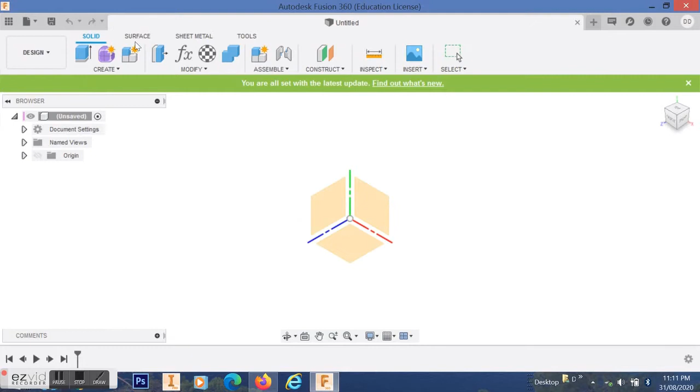First thing is to go and create a sketch. Go to sketch, select a plane on your field of view. Once you've selected that plane, you can select any one of those, and you'll go into 2D view.

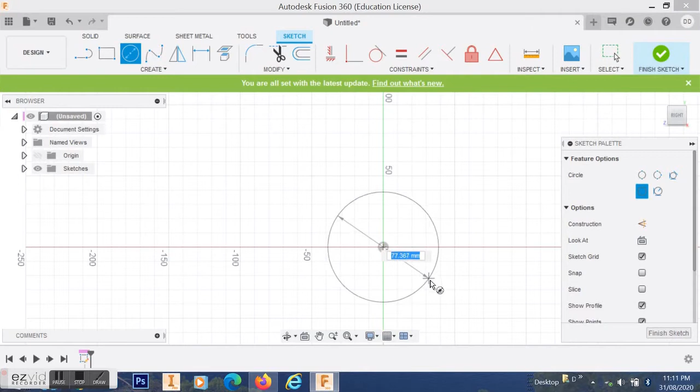Now we're going to create a circle, so select the circle tool, left click, and you'll notice on the side there's a whole bunch of options. Left click, drag out with your left click mouse, and then select the size. I'm going to type in 25 there.

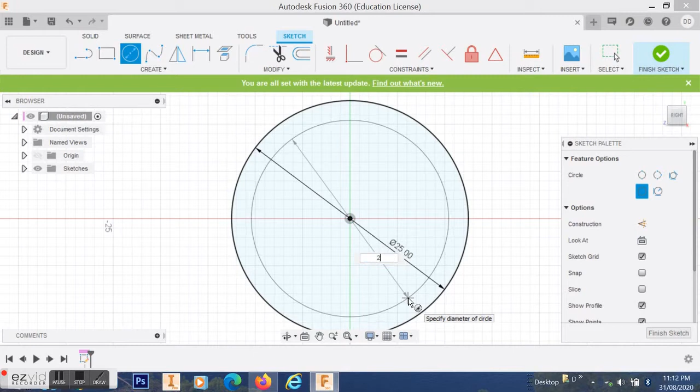Now you can click the fit button if you want to make it big to fit your screen. Click on your circle again, draw another circle out, and this time make it a bit less. This is going to be the thickness of the ring. I'm going to make it 22.

You just type in 22 and hit enter. We've got two circles there. With that, you can use the spin button over here to move your object around in 3D space.

It'll pivot on the center point, so it's useful for you to know. I think we might move across now and start to look in the toolbar up here. You can finish a sketch at the top.

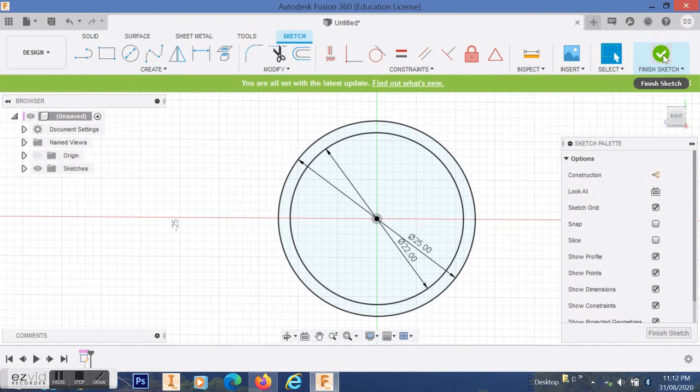Once the sketch is finished, we'll go to extruding to create a 3D shape. So we're going to create that surface and make it an extrude. We click the extrude button up the top there on the left, highlight the surface we want to extrude. Now you're going to hover over the middle of it and it'll turn a blue color.

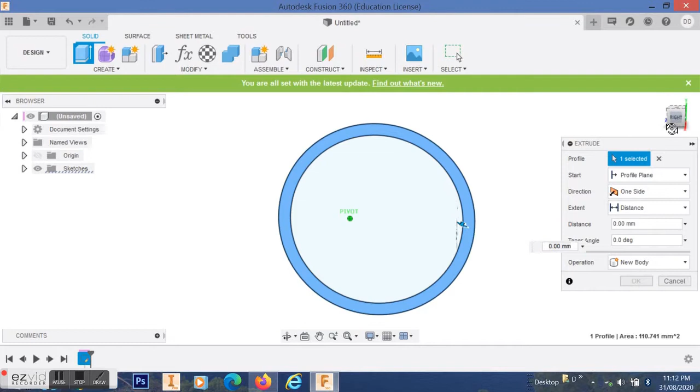On the extrude panel on the right, you'll see a range of options, and particularly we're going to focus on extruding on both sides, making it symmetrical. So you can see the two arrows appear on that disc. There's the two arrows, and we want to drag those out.

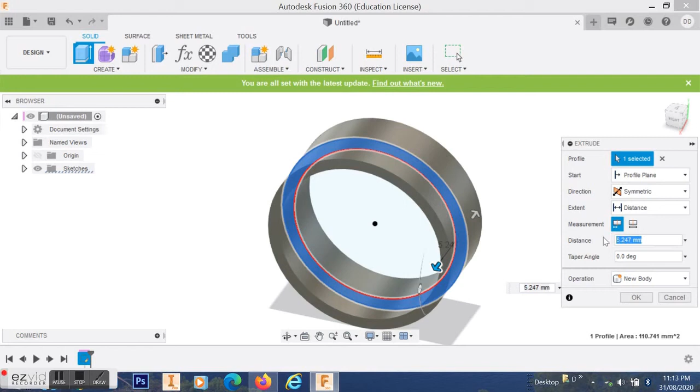We can drag it out by hand if we want, or we could even enter a dimension if we should so choose. So I might make it 10 millimeters on either side, and then click OK, and now we've extruded the object 10 millimeters on either side from that center plane.

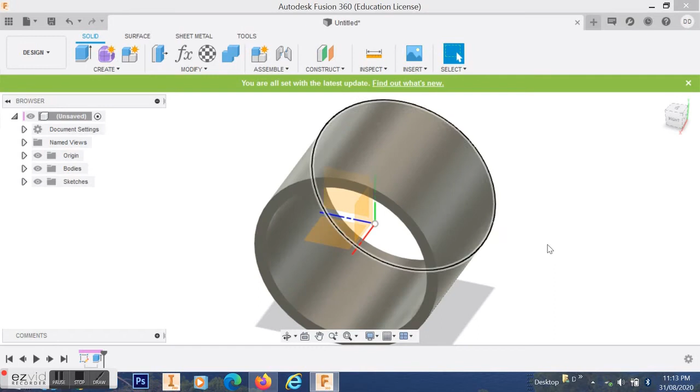Next stage, I'll tell you a little bit about turning it on and off. So if you can't see your center, or if you can't see anything, have a look at those eyes on the left hand side and click them, and you'll be able to bring objects into view and tools into view, or take them out of view if you want.

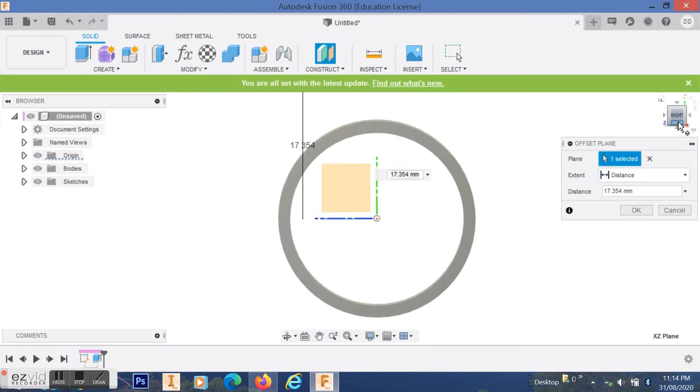Now we're going to go to create a plane. So we're going to select a plane from the plane menu and drag it up, and I'm going to set that plane at a distance of - well, I can just drag it by hand if I want, and type in the information that I want to type in.

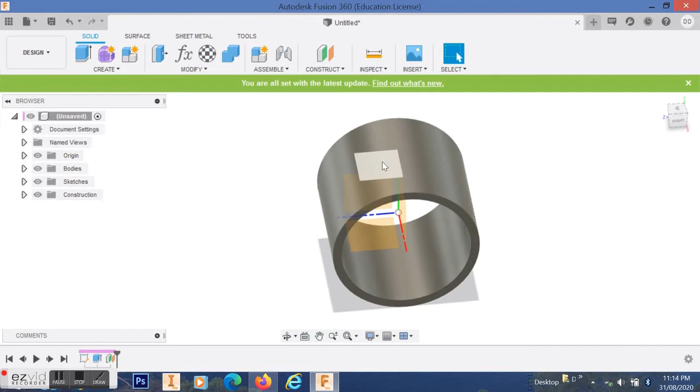If I want to make it precise, maybe make it 14, and then it's time to create a plane. Now that plane we select, we're going to draw on it. We're going to draw on top of that plane because Fusion has to draw on a surface.

You can right click and then select from a menu if you want, which is what I've done, and then we're in a 2D drawing mode again. Now we're going to go to an ellipse. So select from your create panel an ellipse.

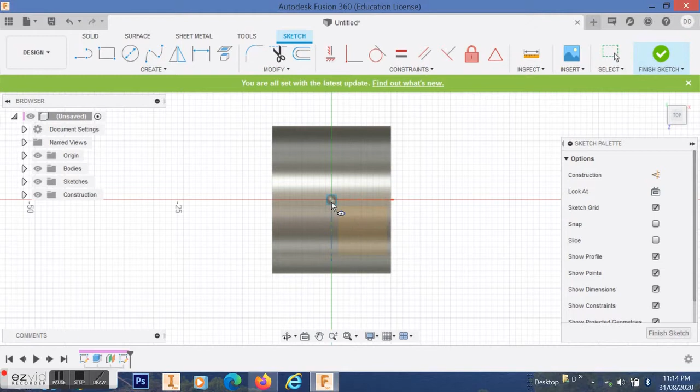Center click on the right in the middle of the top of our ring, and then click on another little section which is the radius of the ellipse. I'm going to go right out to the edge with my left mouse button and then just simply drag out, and you start to see the ellipse forming. Now you can hit escape at any time if you want to get out of this and try it again.

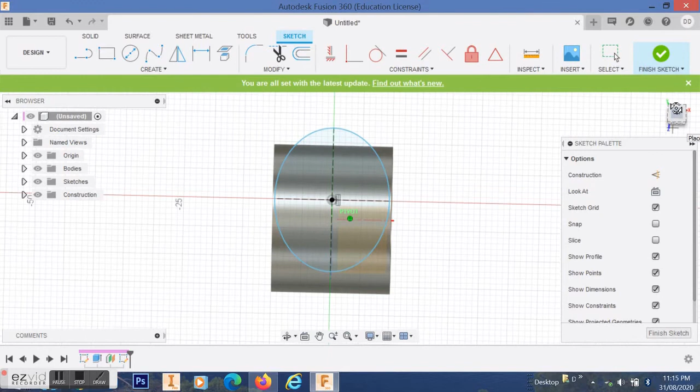Okay, so now I've drawn an ellipse, 14 millimeters from the center of the ring, sitting up there. It's going to be the top surface of the ring that I'm going to put a letter on. There it is sitting, because pretty soon we're going to actually create a loft, which is an interesting transition from one shape to another.

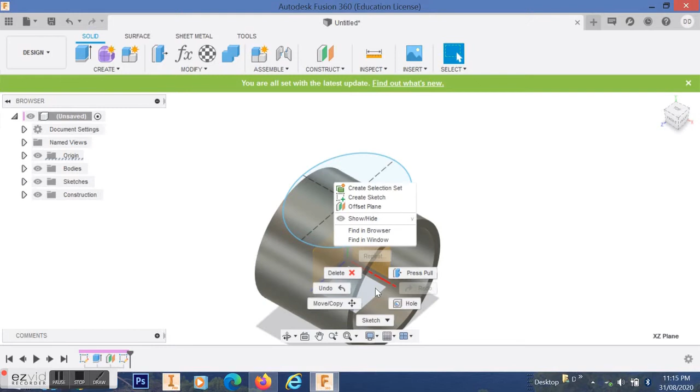Before we do that, we're going to select that center plane down the bottom as I've done, and then we're going to do a sketch. I'll right click to get that menu, and we're going to hit the slice button. Now that just takes a slice all the way through so that we can actually see more clearly how big we want to make our rectangular shape in the middle of the ring that we're going to loft to.

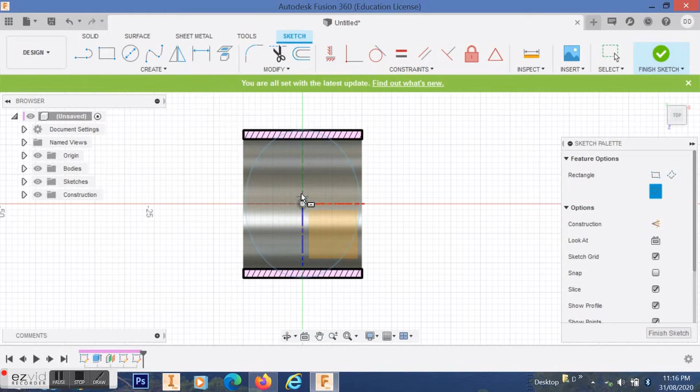So we're going to create a rectangle shape once you've sliced. Go up to your drawing panel, select rectangle, and I'm going to say that type of rectangle. So from the center, drag outwards. It'll be symmetric about the center, and as long as you go hover in between the thickness of the ring, finish your rectangle so it sits inside there.

When we come to doing our loft, we'll find that the loft will embed into that shape.

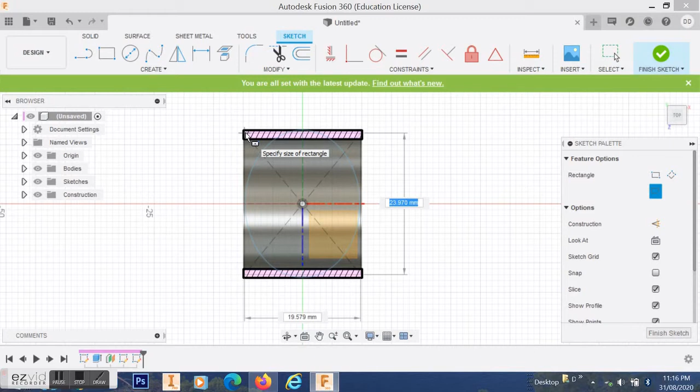Go in between your outer and your inner edges for your rectangle on both sides, fairly close to the edge if you can, and eyeball it. Release and hit enter, and we've now got a rectangular sketch sitting down there beneath our elliptical sketch.

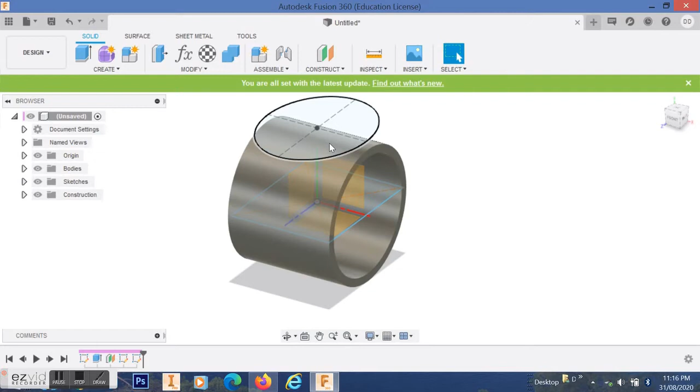So now comes the fun part. We finished the sketch off, so there it is. You can see our shapes, our ellipse and our rectangle. And now we're going to go to the Create menu again, and we're going to find the Loft function.

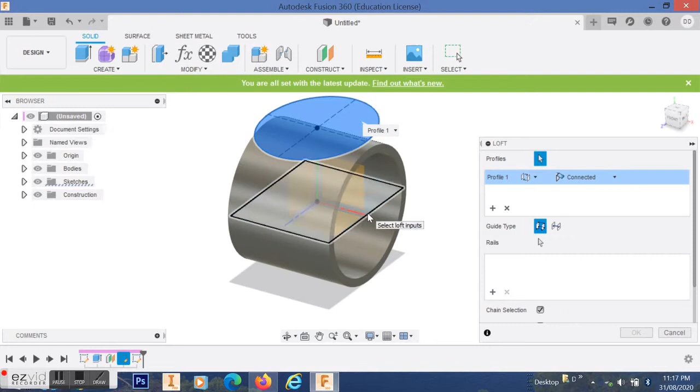See how it transitions one shape to another? Okay, so here's the dialog box, and the first thing I want you to do is find out what the first shape is. Select that by left mouse button clicking, and then you'll be wanting to find out what the second shape is that you're going to transition the loft to. In this case I want it to be that rectangle. I highlight it, make sure it goes nice and blue, and your shape transitions, as you can see there.

If you click OK, you'll notice I've actually cut out the shape instead of filling it in with a solid body. So if you want to fix that up, go back down to your memory bar at the bottom, and then right click on the latest one of your tasks, and you can edit it.

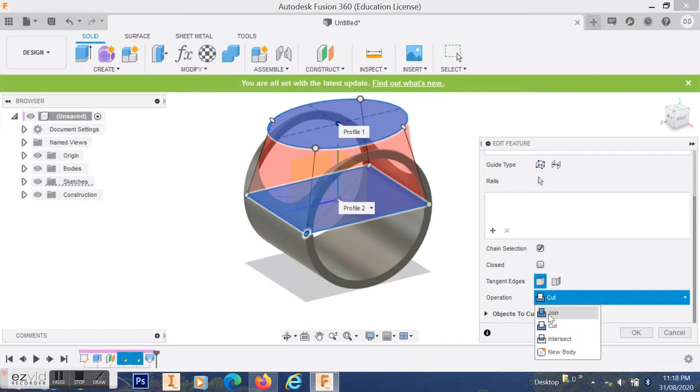You can edit task, and now look down through the menu here. We'll go up and down a few times, but don't forget on the right hand side there's a scrolling bar. So eventually we'll get to that scrolling bar and drag down, and you'll see that the object can be cut or joined or intersected. So we want to create a new body, make it solid, and click OK, and now you see you've got that solid body that we want.

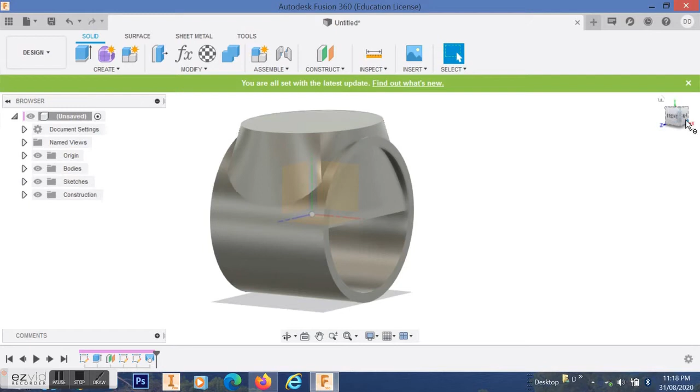But there's some stuff in the way in the middle of the ring, so we need to remove that. So in order to do that, we're going to have to do another sketch and create a cutting plane. I'm going to select the plane to sketch onto, which will be the edge surface of this ring.

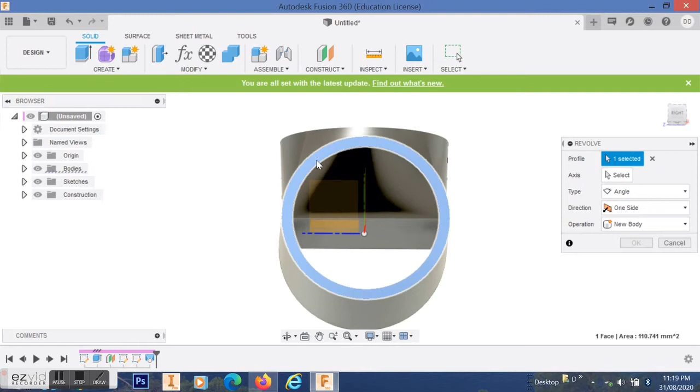Okay, so we'll select the plane and we'll create a sketch. We'll create a sketch and then select it onto the plane. It doesn't matter which order you do it. And now we'll begin a sketch on that plane.

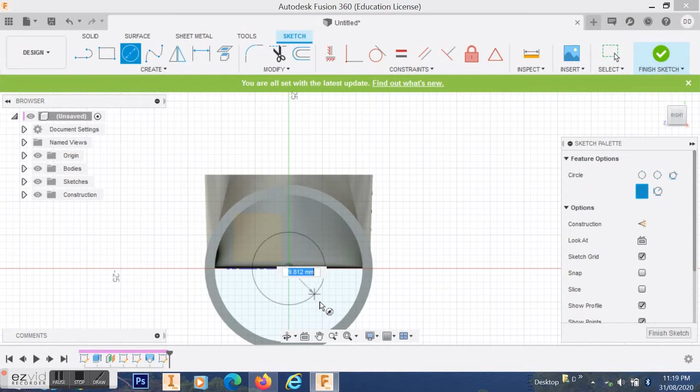Okay, we're in 2D view. Now we want to get rid of that big bulge in the middle that we've created through our loft. So we're going to do a circle, select a circle, draw it out. I know that the inner radius diameter is 22, so type in 22. That takes us exactly to the right point.

And now we're going to remove that section there. See that section I'm highlighting? I've highlighted it by left clicking. Go along, you can go to create, but really you probably just need the modify menu.

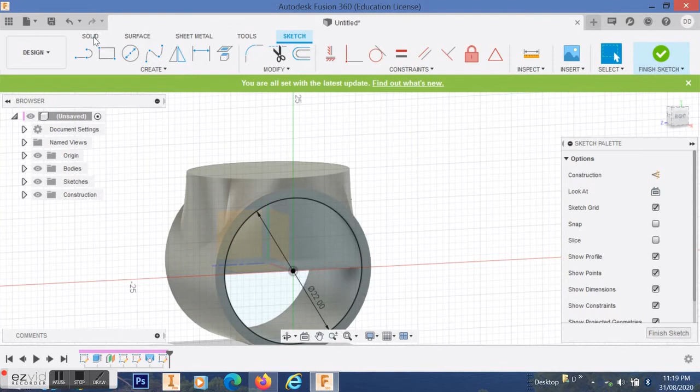If you click on solid at the top there, you'll get your extrusion button. Select the area that you want to extrude. There it is. And now you want to cut, so make sure you're cutting in your menu and just drag it through with the handle, the arrow handle. You can click OK. And now we're starting to get more of a shape of our ring.

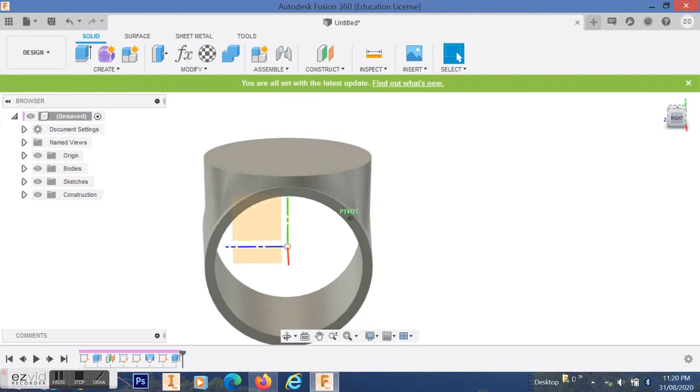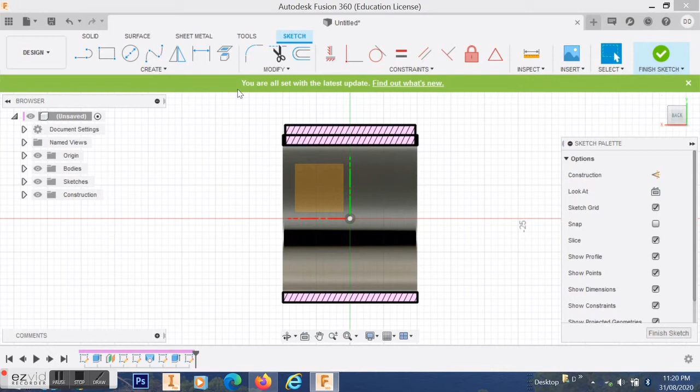Still a bit thick and fat. We're going to make another adjustment in a minute, but you can start to see it's coming along. I want to trim the sides of the ring to make it a bit thinner, a bit more presentable. So to do that, we're going to create a sketch on a plane which is vertical, that splits the ring in two from top to bottom. And then we're going to hit the slice button to be able to split that so we can work out exactly where we want our lines to go more clearly.

We're going to select the line. Now when you select the line, we're going to go to a spline. Two different sorts of splines.

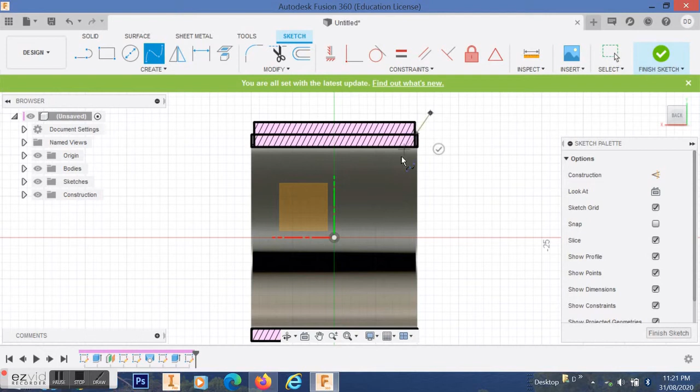Select the top version, and then you're going to do a series of dots, and the line is going to follow in a smooth fashion between those dots. But I want, because you're going to slice through this line later on, the line to be a bit curvy with a bit of artistic license and talent in there.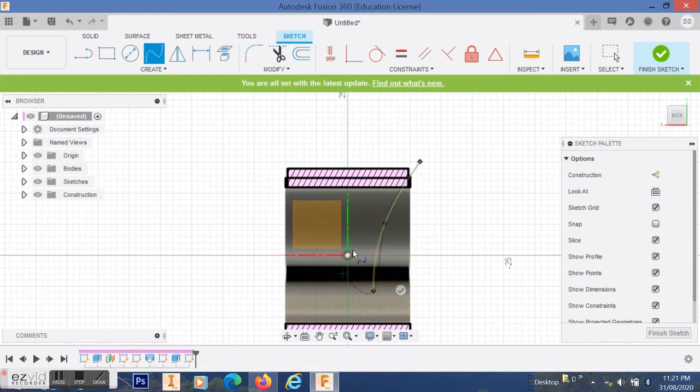All the way down so it cuts across both surfaces or both edges of the diagram you're drawing. Now, if that ever happens and you've got a loose end on a spline, you can always hit the escape button and start again if you need to. So the escape button's a good thing to know about.

So I click on the last part of the line. Now I've got to get rid of that whisker. If you hit escape, you go back to nothing again. It all disappears. So we'll do it one more time, just so that you know.

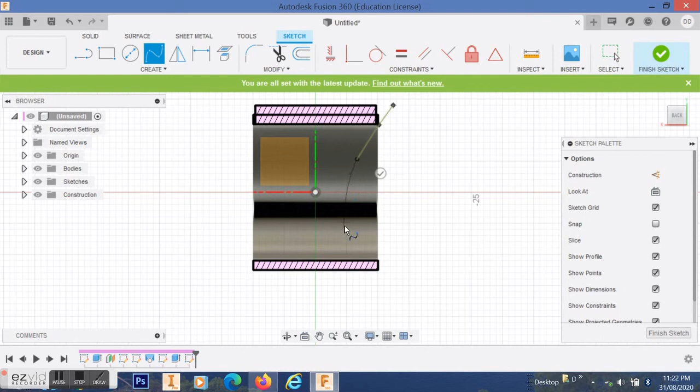I'm going to start outside the object now, because it doesn't matter that I do. And draw my 2 or 3 spots and dots, and I can weave my line in between them. And when I get to the end, you can hit enter. So go outside your drawing, because we're going to make this a cutting plane. Hit enter.

And then we'll just do a normal line and just close the shape in, because you can't extrude any shape that's not enclosed.

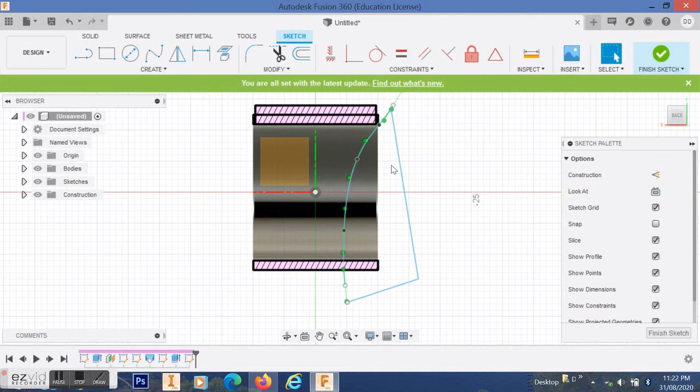Alright, now if you need to adjust your lines, you can get in close. So I'm using the center mouse button rolling to do this, to enlarge my screen. I want to just make sure all my lines are touching, because sometimes they can look like they are, but if you get up right close like this, they may not be touching.

So to fix that up, we'll just move the line into position. You can hover over that point with your left mouse button and drag it. If it doesn't work the first time, try it again until you reach that point where you select the point, and then you can drag that point into position where you want it to be. Very useful feature.

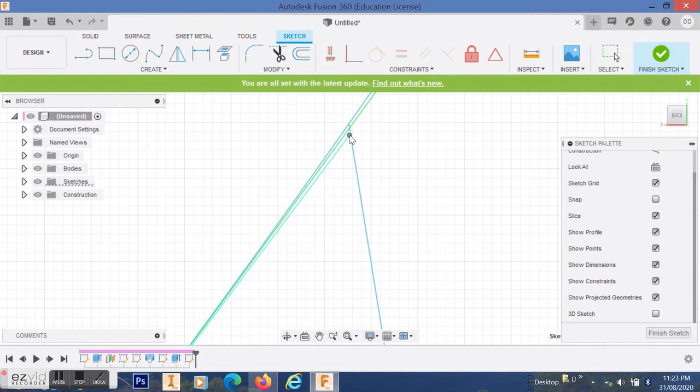Yeah, sometimes there's a bit of hovering to be done over the line. But if I go back out, you should see now we've got a shape.

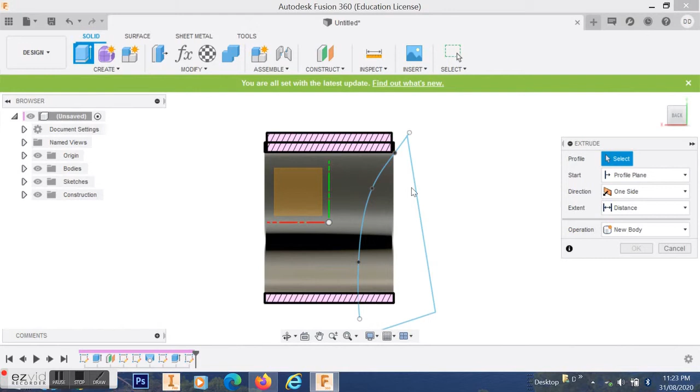Now we're going to go down to use the mirror function. Well, not really the mirror, we want to extrude. So first, now, do you notice how that shape's not extruding? Why is that? Well, in the bottom left hand corner of the shape, you can see the lines aren't joined. They've been moved around. So we've got to fix this up.

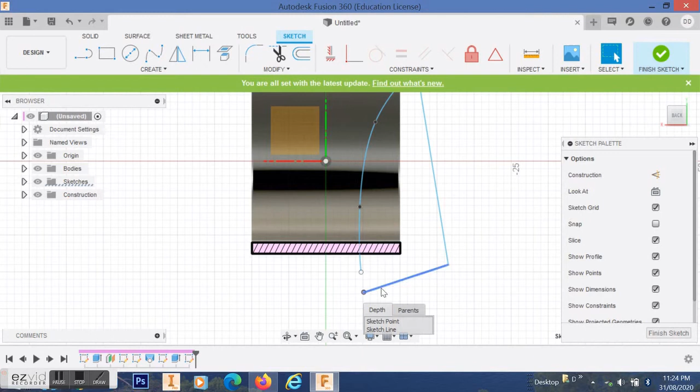So I'm going to go back and align the bottom line with the sloping spline, just hovering over it until I can select it, and I should be able to drag it up. Here we go.

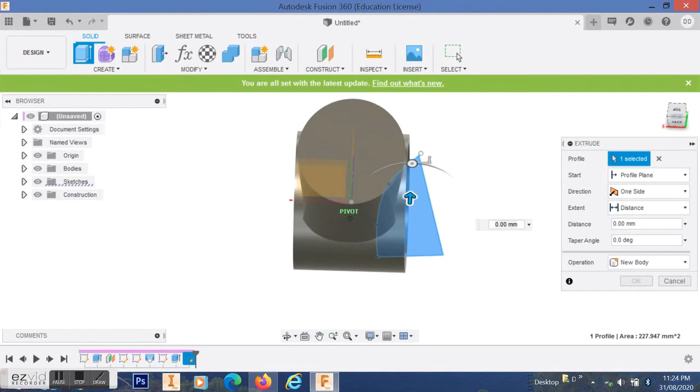That should make it a continuous enclosed shape. I can go back to extruding it now. Up top left, yeah, and it turned nice and blue to indicate that it's an entire shape. And we're going to extrude it.

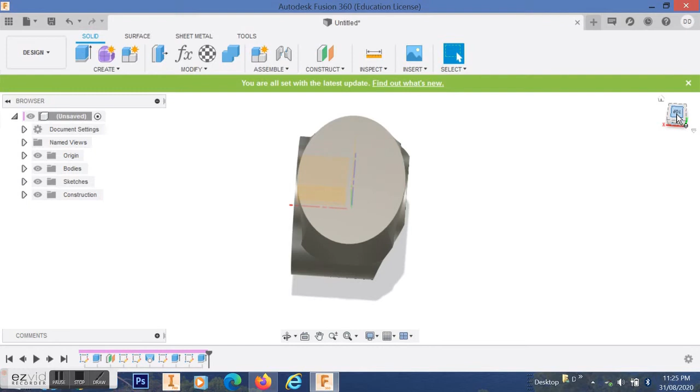Okay, so select the extrude button. You've done this before. Make sure it's cutting. Draw it all the way through so that it removes the material that you want to remove. Click OK. And you can see, if we look now, it's starting to get more of a shape, more profile. A couple of things still not quite right.

For example, you've got a little ridge sitting up there. See where I'm pointing to? I don't like that ridge. So I'm going to go back to my sketch and fix it up.

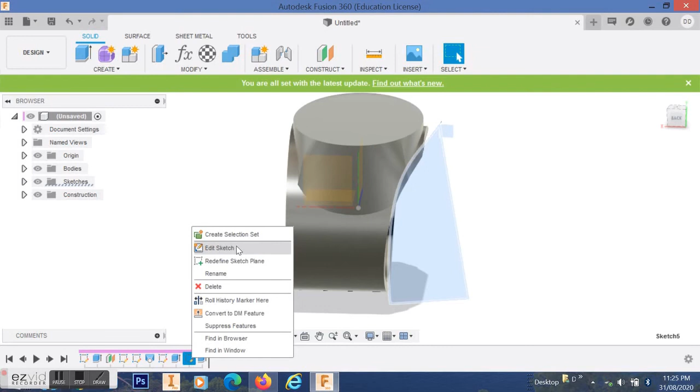So I'm going to go back down onto the history record and then edit the sketch. And then I'm going to drag these lines a little bit so that they remove that little obstacle. There you go, I've dragged it out a little bit further.

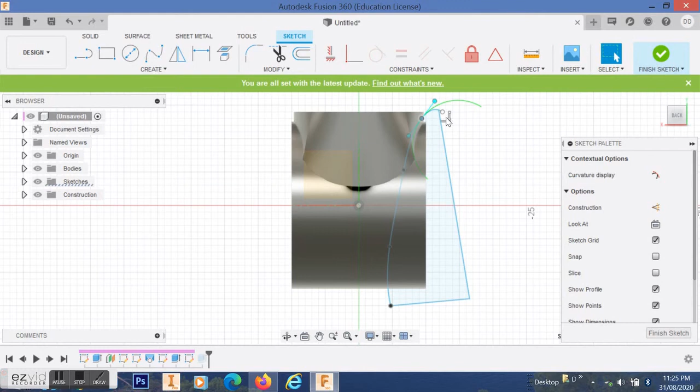And we'll leave it sit at that point. You can play around with it a lot if you want to, but for our sakes we'll just leave it like this at the moment.

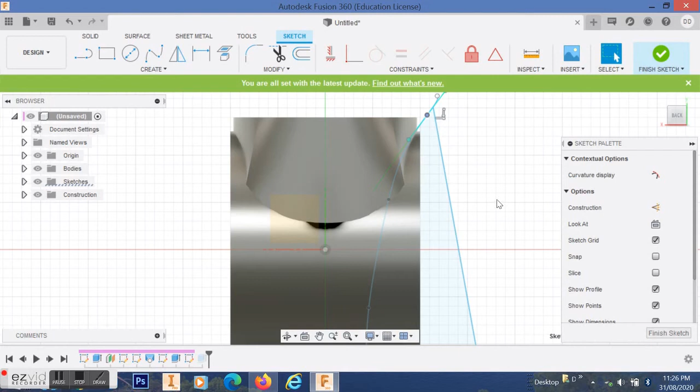Now, trying to size this up to get it just right, but once we've done this, we're going to hit OK, and it'll automatically go through all the motions and extrude the way you asked it to.

So the next thing for us to do is to place some fillets on some of these sharp edges that you can see around this area, around the cut surface.

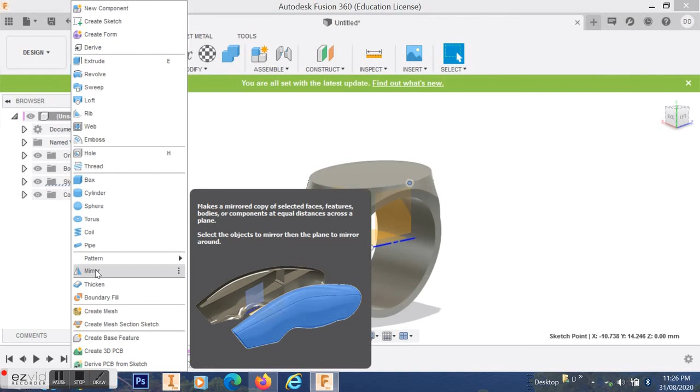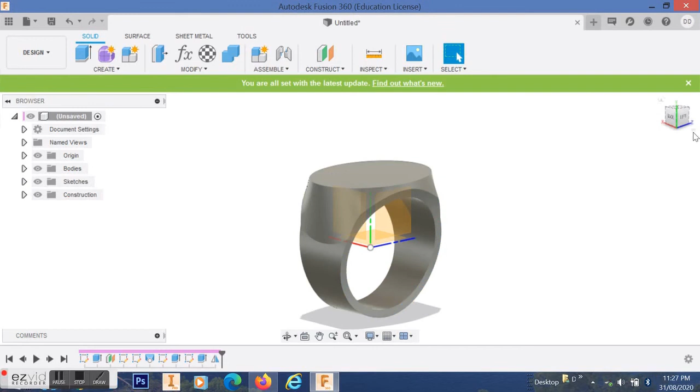So, well, no, actually we're going to do a mirror. So we went down to mirror there, and we're going to create the mirrored surface. So you need to select a plane by which you're going to mirror and an object to mirror about that plane. You can select either an object or select a function that you've done, like extruding or cutting, and it will mirror about that plane.

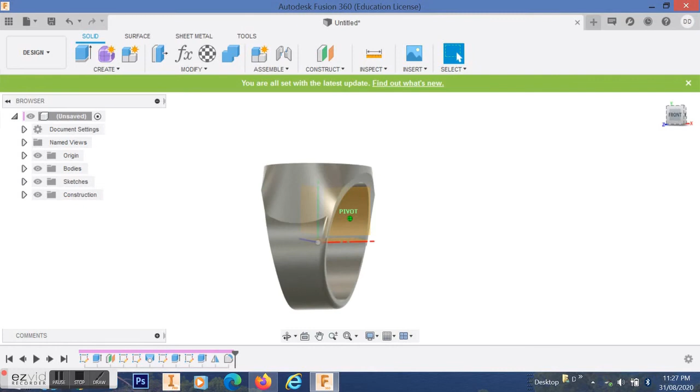Next, let's do a fillet. That's the thing I wanted to do, around some edges. So select one of those surfaces and change your fillet radius. I've made it 1, but you'll see, yeah, that should work. Nice filleted edge is a bit nicer.

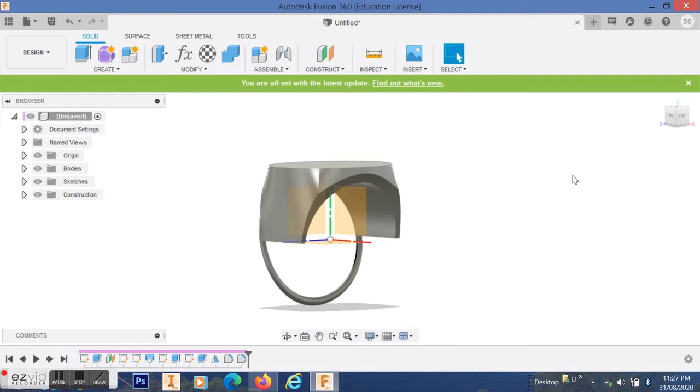And now might try this inner edge. We'll try 1, but it probably won't work well because this geometry won't be able to survive with 1, it's too big a radius.

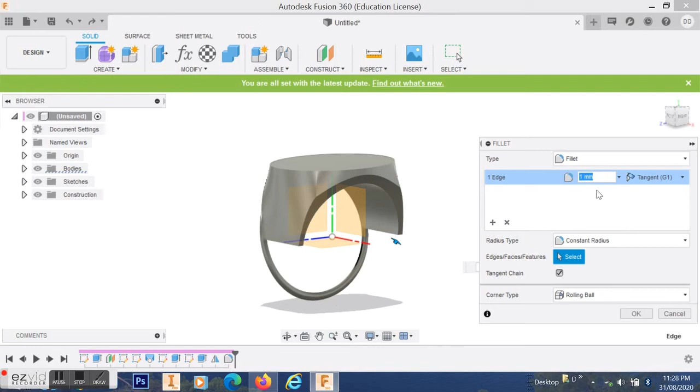So we'll go back, we'll edit that shape, that fillet that we tried to do, and we're going to create a radius of 0.5 of a millimeter just to take the sharp edge off a little bit. So go fillet again and change that to 0.5. It won't work with 1, we need to change it to 0.5.

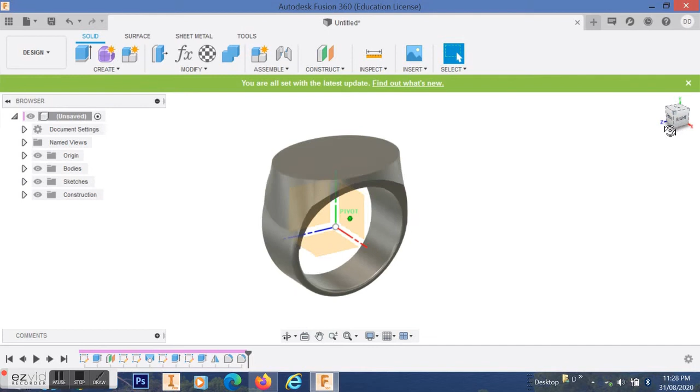And we can also mirror both of those two fillets that we've done to the other side, should we so choose.

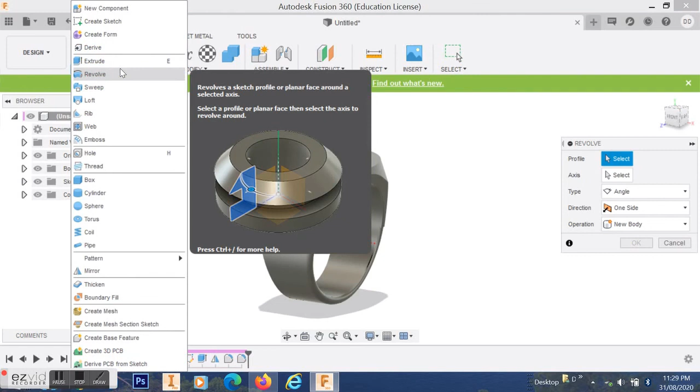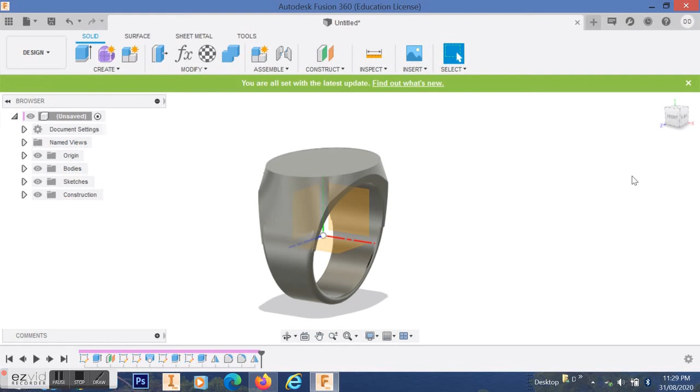Yep. There's the mirror function. So again, select the center plane that we're going to mirror around, the vertical plane in the middle. Select the objects that we want to mirror, and then press OK. So whatever happens on one side of the ring has now happened on the other side of the ring, mirrored through that center vertical plane.

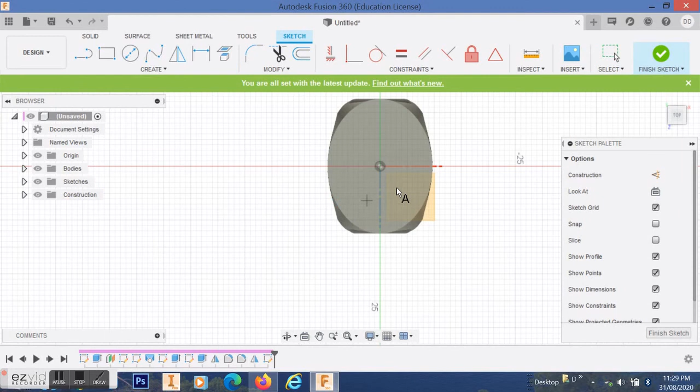Okay, so probably the last thing to do is select that top surface and then go down into the Create menu and create a drawing, and then create a text. I'm going to put a bit of text on the top of it and engrave it. So let's see what we can do with that.

So select text, type in the size that you want, select the type of text script that you're interested in, and there's lots of options to choose from. I want to go something a bit antique, so I'll scroll down here amongst the different type fonts and find one that I like.

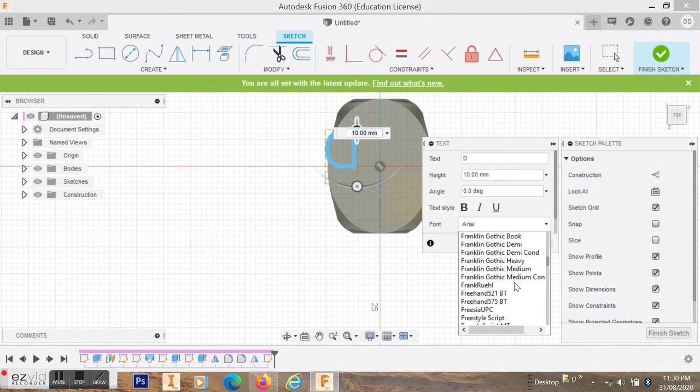And if you click on them, you'll find that the type font will change, so you'll get a feel for what they will look like, all the weird names. I'm playing around having a look through all these type fonts, but this one will do. A nice fancy French one, or maybe not quite. I might go for something a little bit fancier. There we go, something like that.

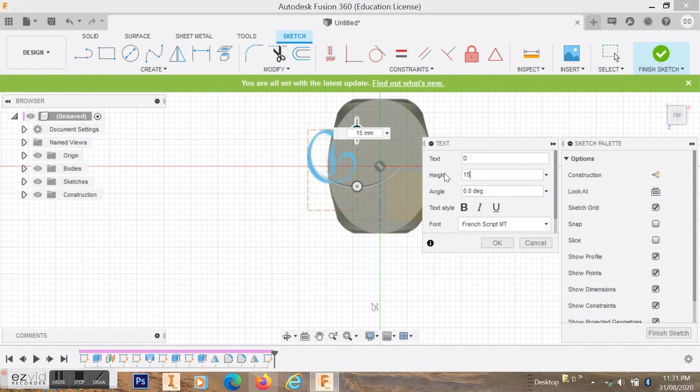Now the size can be adjusted, and you can grab that little grab handle and twist it around until it's the right shape that you want it to be. You can position it. Once you position the middle, grab the center locating button and you can drag the whole process to where you want it.

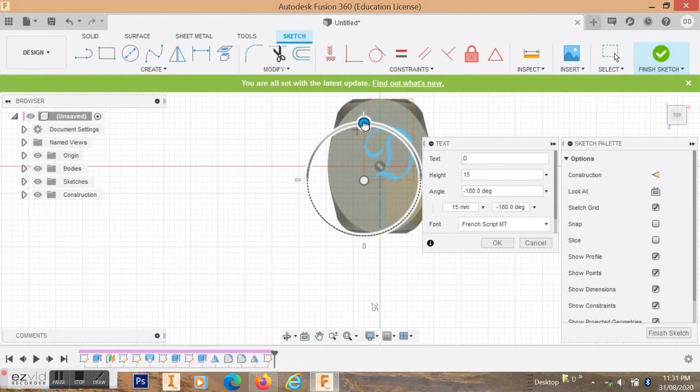I don't quite like it there standing up like that. I think I want to have it around a different way. So although I've positioned it in the center, I think in a minute I'm going to change it around so the text is running vertically, not horizontally. Here we go. By just winding that second button down, I get the text in the position that I want, and then I can drag it into the center so that it looks pretty good.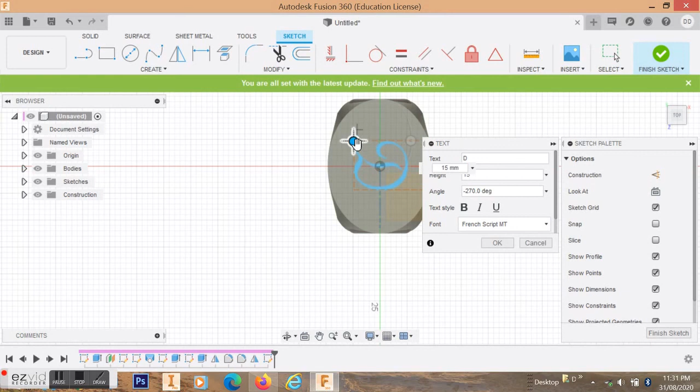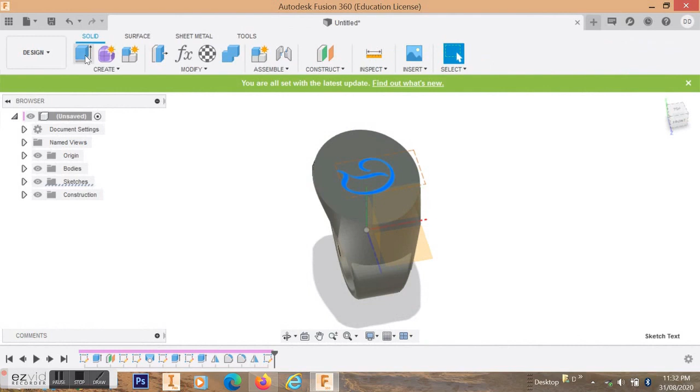Click OK. Now that's just a two-dimensional shape there on the surface. I want to extrude that, or cut away some material underneath. So I'm going to finish the sketch off, and I'm going to select the surface so it highlights, and I'm going to select extrude, but this time I'm going to cut away a short distance.

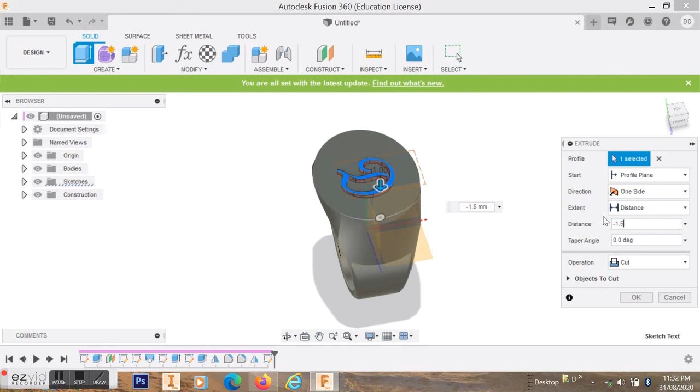You can drag it by hand or just type it in, 1 or 2 millimeters, and then you can select OK. It's just in one direction this time. And the ring is almost complete.

There it is. We might just put a little bit of color to it, so go to Design and go to the Render submenu, and then select the material. That's the color wheel over there. Select that, and we'll find it by scrolling down. There's gold here.

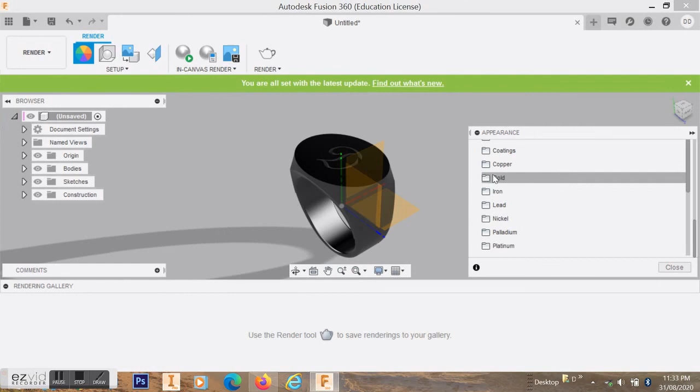Select the metal. I'm going to go for some gold, and then drag that metal shape onto the object, and it will take on the qualities of that metal shape. So you've got to drag it across. If you remember that, it'll be good. And you've got a golden ring.

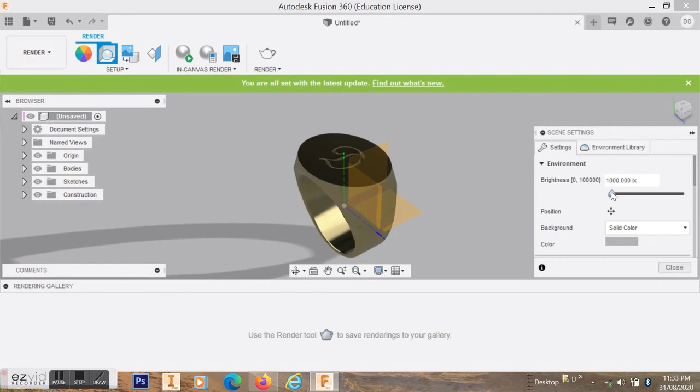Now you can do more things with the renders. You can place them in scenes, and you can do some fine adjustments, which you can play with around with those yourself to your heart's content. I suggest you do, it's quite a powerful rendering engine on Fusion 360.

And when you do your design, just keep in mind that with 3D printing, you don't have the tensile strength of steel, so don't have a little bit of stuff hanging out from one side or the other side of your project, so that it can easily be snapped off when you're printing. Remember that you need to have some stiffness and support for your materials.

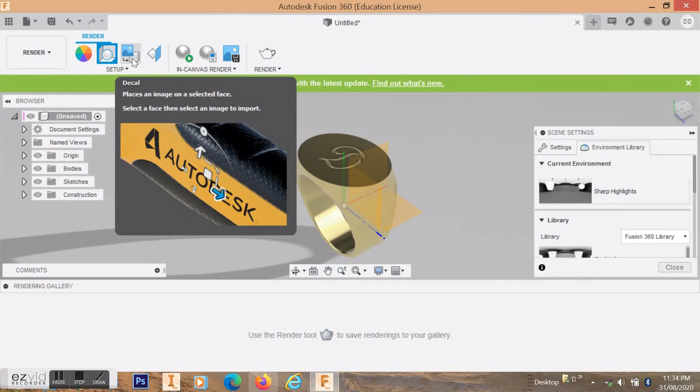Okay, so there's a few more little adjustments I'm just walking you through here. If you want to play with light sources and so forth, you can have some fun and do that as you're ready.